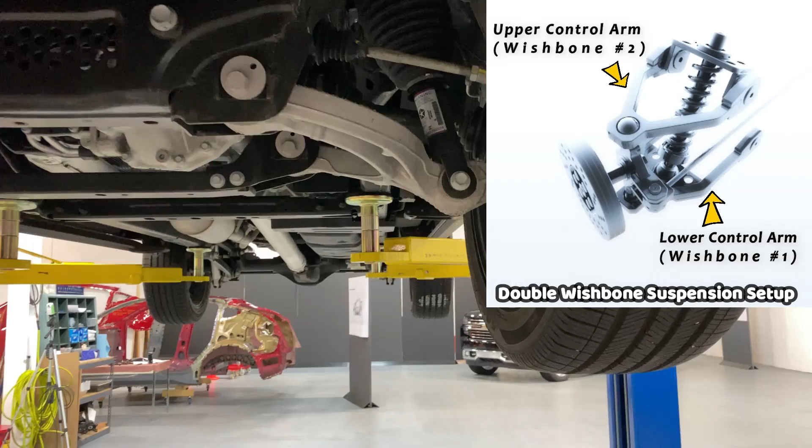Okay, so we're standing underneath the Ram now, and we're going to be talking about the front suspension. And the front suspension, like pretty much everybody else, has a double wishbone suspension system. So let's have a look at what that all means. We're going to show you a little picture underneath here, and you can see that it looks just like the thing you break apart on Thanksgiving trying to make that big wish, and hence the wishbone moniker.

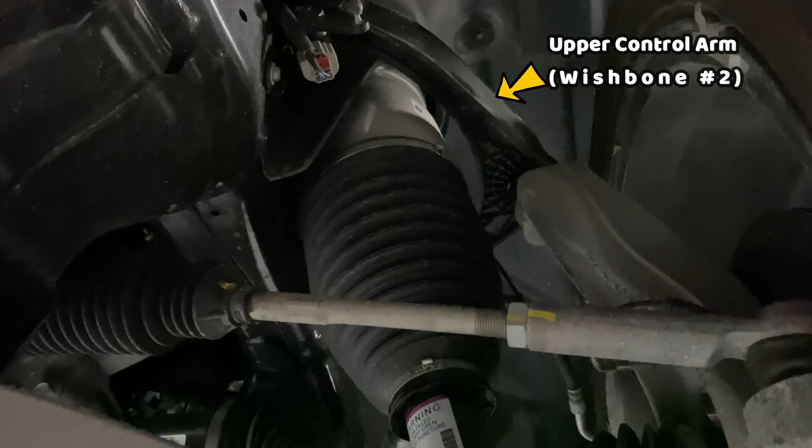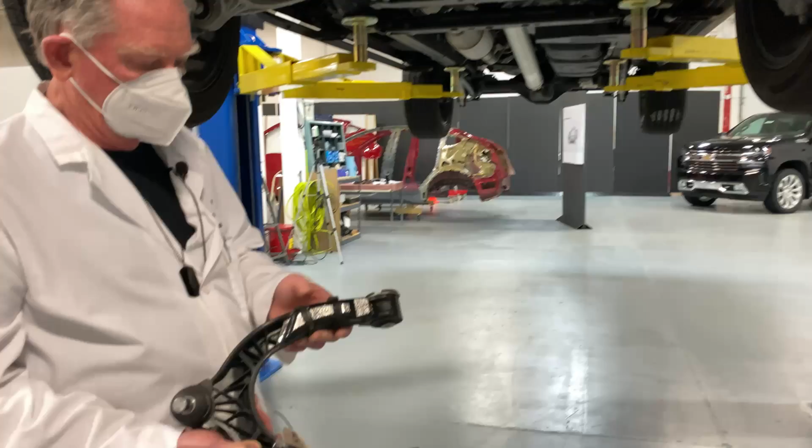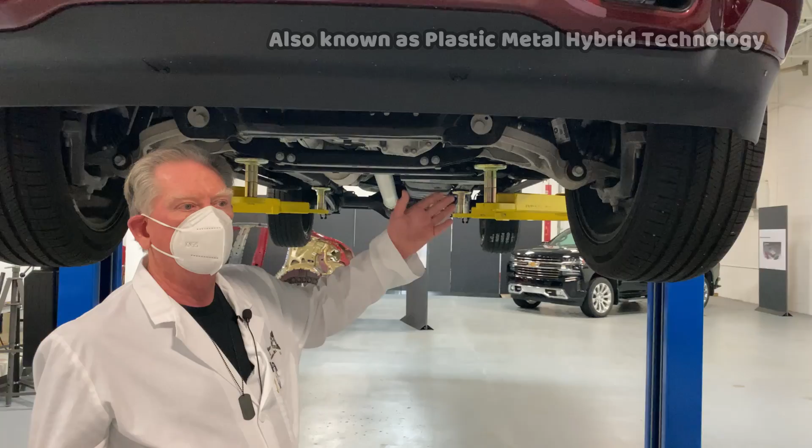Let's have a look at the upper wishbone, the one that's way up there and it's kind of black and covered in plastic. And then let's have a look at this wishbone, which came off of the Model 3. It's got the wire tabs on it. So you'll see here that this is made out of stamped steel with overmolded plastic. If it's good enough for this truck, it's probably good enough for the 3 and the Y, and that's kind of what we're going to see. We're going to be seeing more and more of this overmolded plastic and things like that.

So let's move over and have a look at our friend here, Mr. Musk. Very difficult to see him, but if we have a look right down here, we can see exactly what's going on, and that's a double wishbone. Very similar to what we've seen over here. The only difference being, because it's black, we're going to assume that that's a stamped steel lower control arm. I would personally go with the aluminum, like what the Ram has, but steel is what's used on the F-150 and the Silverado.

So let's just have a look at this for one more thing, and that's something that we're going to talk about in a little while. This little doodad right here, that's part of an air shock system. That's different than what the F-150 and the Silverado have. They have a coilover there. So we're going to be looking at that in a few minutes.

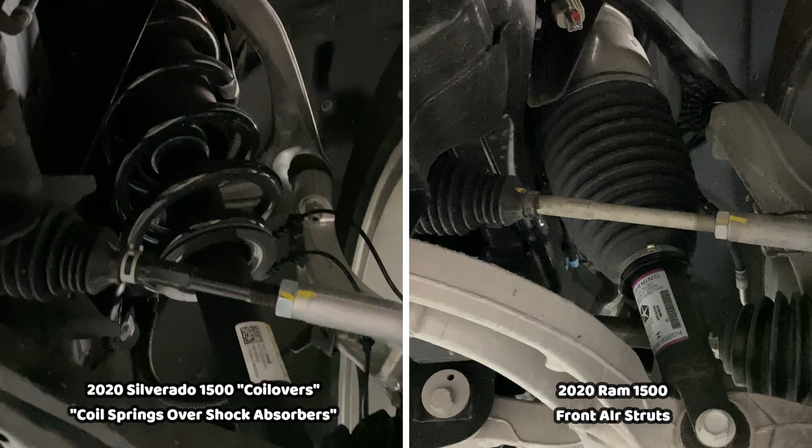But right now, the big takeaways here: the aluminum wishbone on the bottom, the stamped steel with plastic overmolding on the top, and the air shock system that are on the Ram. Okay, so now what we're going to do is talk a little bit about the knuckle, the front knuckle.

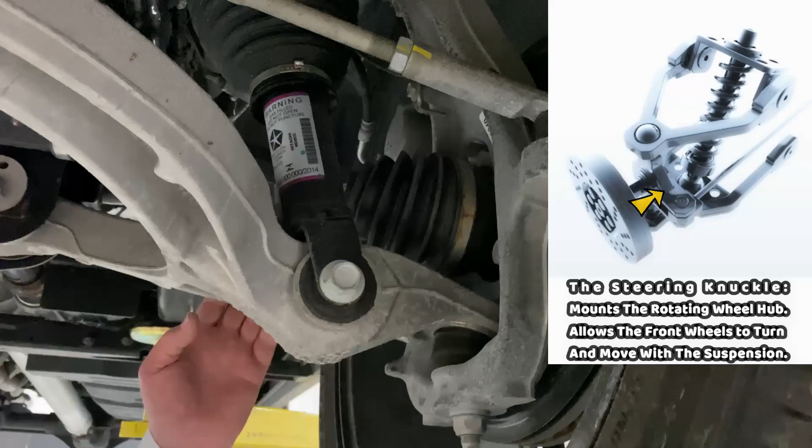Now, a lot of you have said that you're not automotive engineers or you really don't even know that much about cars. So let's just have a look at this big aluminum part right here. That is called the front knuckle. The things that tie into it are the upper and lower control arms, or in this case we're calling them the wishbones. We're looking at the steering rack mechanism that turns your wheel.

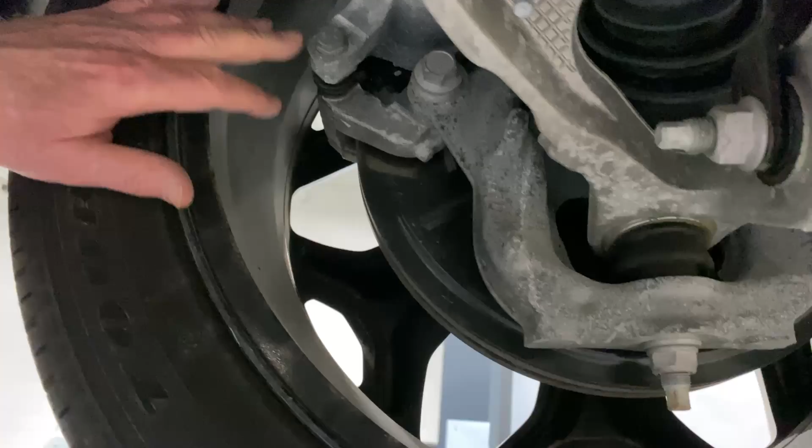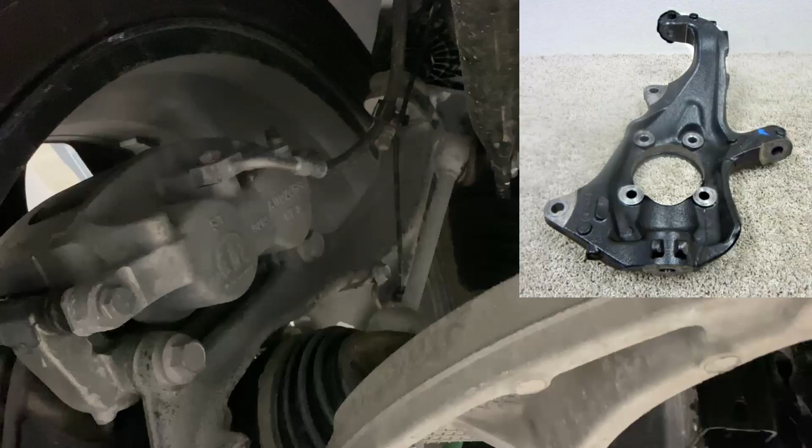Now, this is going to be fairly common to everybody. These things for the light-duty trucks are always made out of aluminum. For heavy-duty trucks, then there's a change, and they move from aluminum to cast iron or cast steel, and that's because the duty loads on these things are astronomical, and they need that extra strength.

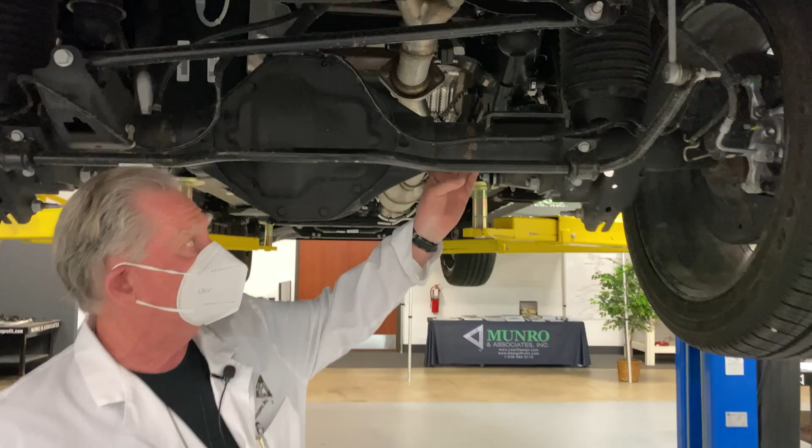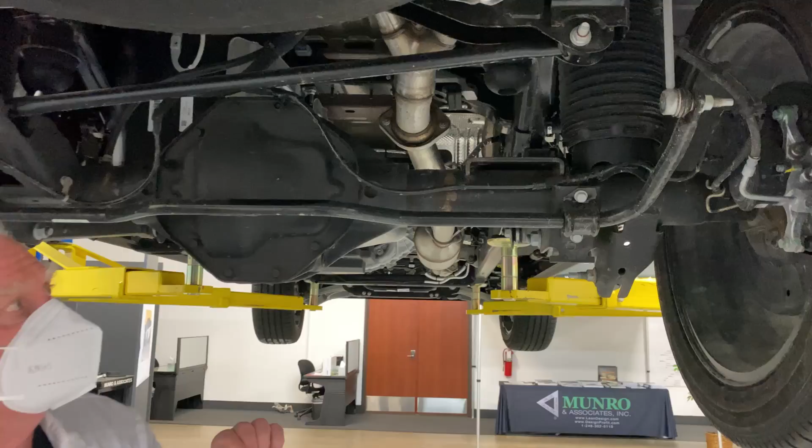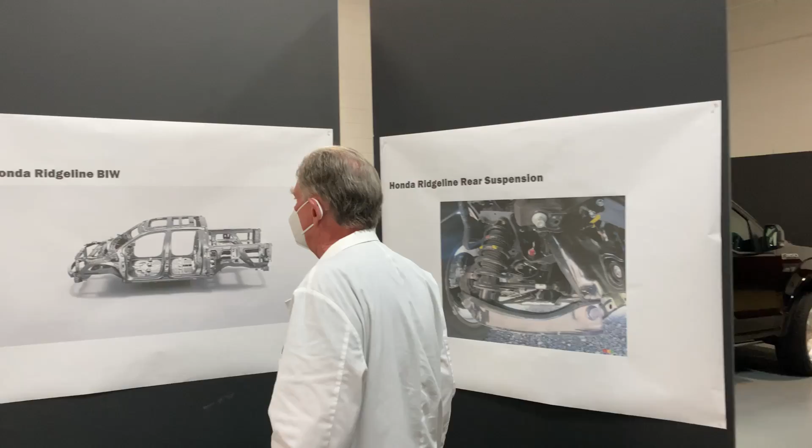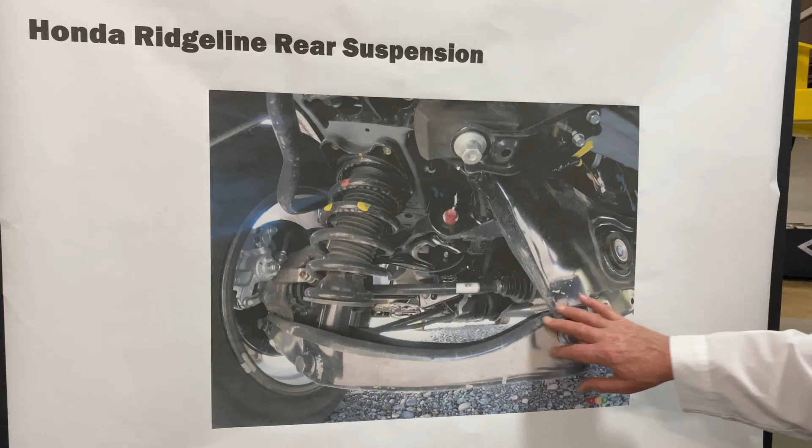But let's talk a little bit about the Cybertruck, because it's going to be different. So the only thing we've got in the way of a Cybertruck kind of design, again, would be the Honda Ridgeline. This truck has independent front suspension and independent rear suspension. This suspension system here, this is what the Honda Ridgeline looks like, does not have a beam axle. It doesn't have anything except for what we would classify as a semi-conventional rear suspension. It has four-link suspension and a spring-over shock.

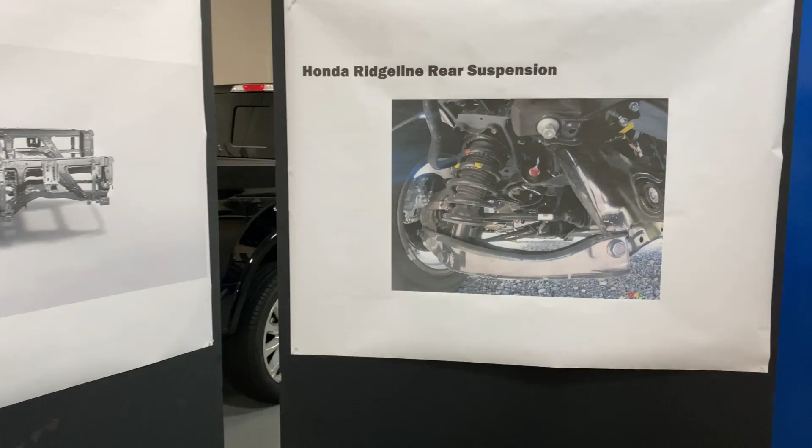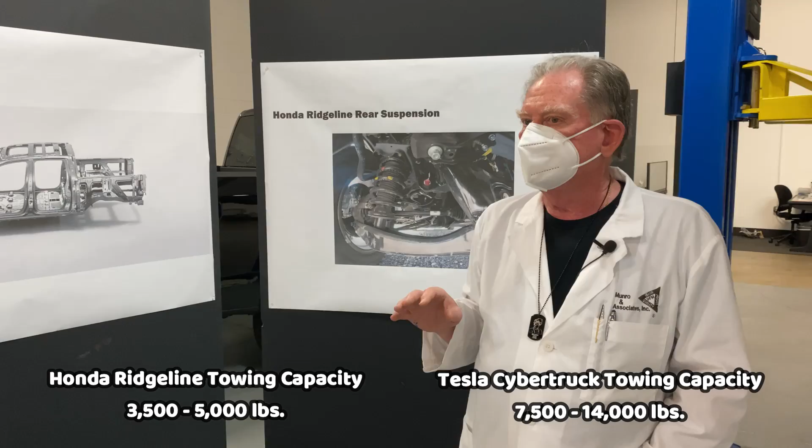However, with the towing capacities that the Cybertruck is supposed to have, I have no idea how they're going to be making that type of a system work, because this is only good for 3,500 to 5,000 pounds, whereas the independent linkage that the Cybertruck is going to have is going to be much more robust than that. So we'll have to wait and see what goes on.

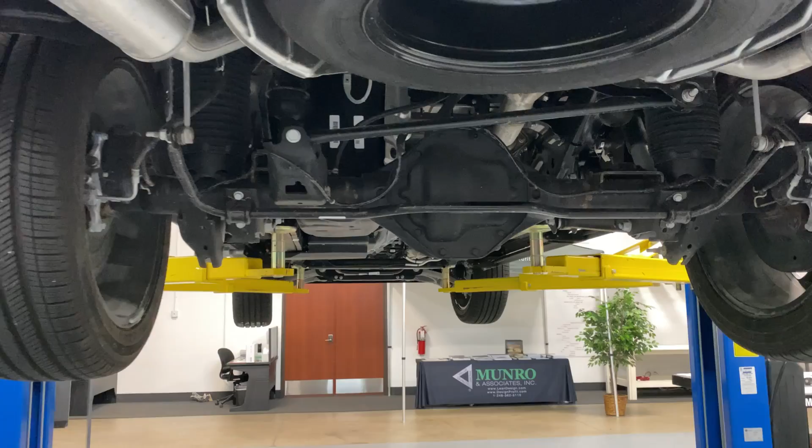Now, one of the things that I didn't mention was, why is this still a solid axle? And that would be because this is really good for stability, and especially if you're towing very heavy loads. We just talked about the Ridgeline, and that's about 3,500 to 5,000 pounds. This truck can probably do about double that, but the heavy-duty versions can get up about 3 times more than that. So this is the conventional way of doing the job. Let's talk about the ancillary kinds of parts that have to go on in order to make this work.

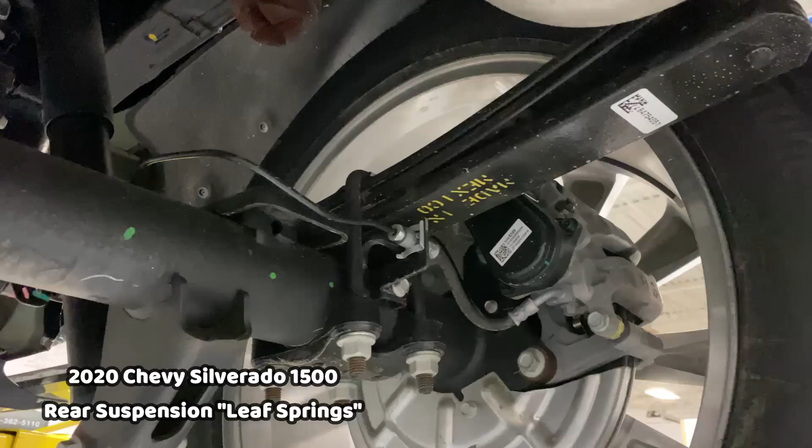Okay, so we're showing you the Ram because it's basically a more advanced and an outlier, if you like, as far as trucks are concerned. Most trucks, for the rear end here, would have something entirely different than this. They would have leaf springs. The leaf springs, we'll show you a picture of that, but the leaf springs are the oldest way, really, of handling a truck's body load.

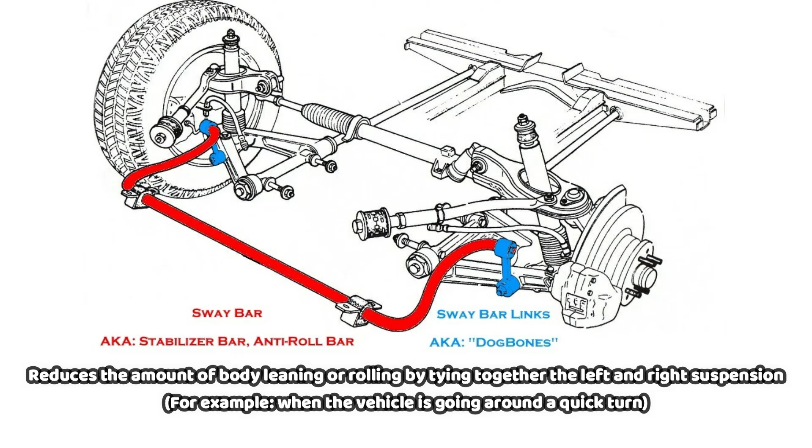So this is different in that we've got 2 linkage components out here, and then we have a stabilizer bar similar to what you'd have in the front, with dog bones and whatnot. And what makes this truly unique is the fact that we're looking at an air suspension system.

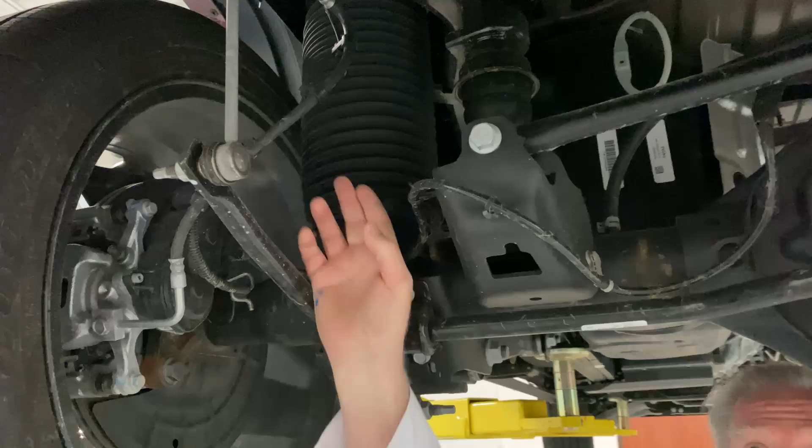Okay, but the benefits that you get off of putting this in, first off, this is more costly, but the benefit that you get is ride and handling. This is what made the Ram a luxury car of the year. It's the ride and the handling that makes it the best. Now, I will tell you that there are a couple of other unibodies that did have solid axles, but they're ancient, and they would be the Jeep XJ and the Jeep ZJ. These were outliers as well. It wasn't something that everybody wanted to have.

The outliers are fine, but we'll be more interested in seeing how Tesla manages to accommodate the massive projections that they put out for the tri-motor Cybertruck, something like 14,000 pounds, in the absence of a solid axle. I think that the Tesla is going to surprise us. I want to see what they do to execute their rear suspension system.

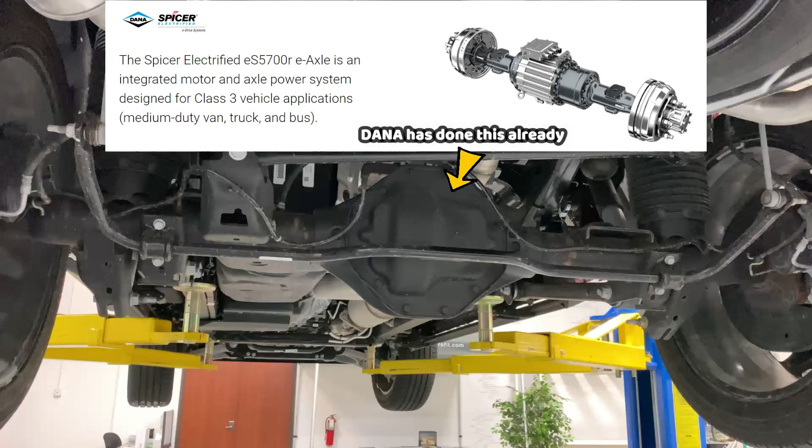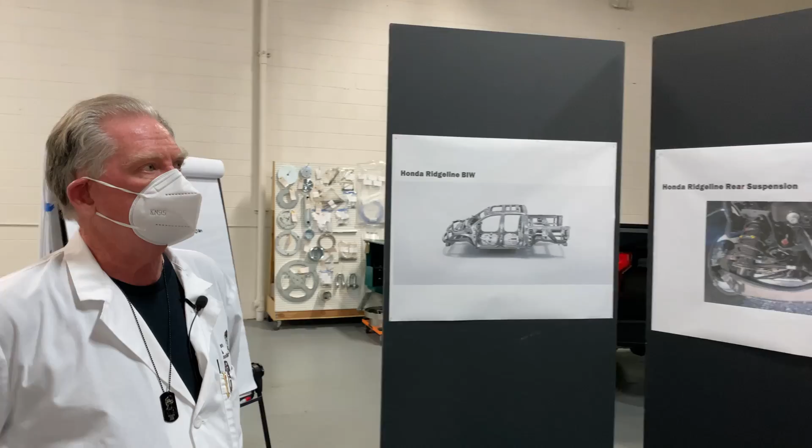While it might be theoretically possible to package in an electric motor within the context of a solid axle, basically swapping out the rear diff for a motor, it would seem that this may inhibit their ability to share motors among various vehicles, configurations, and even other models. So we're hoping to see whatever Tesla's got in the way of the Cybertruck rear suspension, but for right now, it's a bit of a mystery for us. Okay, so now what we're going to do is we're going to talk a little bit about the air ride system that's going to be going into the Cybertruck.

So the first question is why? Why do I want to do that? Well, that terrible ride that you get out of a truck comes because of the coil springs in the front and the leaf springs in the back. You see, what has to happen with this truck is that it's made to work, and that means it has to have a very broad range of conditions that it's going to have to live in.

So is this truck loaded? Has the truck got 4 guys in it, 5 guys in it with the crew cab? Has it got 1 person? How are we using the truck? And it's going to be different every day. And that variety of different conditions is so great that, unfortunately, you have to sacrifice something. And the thing you're going to sacrifice is the ride. The ride and drive is going to be a little on the tough side.

So let's talk a little bit about what's going on here with the Cybertruck. This truck, even at the low end, is supposed to come in at $40,000, and it has an air ride. That's very unusual. Not very many cars, or trucks for that matter, come in at $40,000 with that type of a situation. $40,000 is usually too cheap. But the Cybertruck is coming in at that price right now.